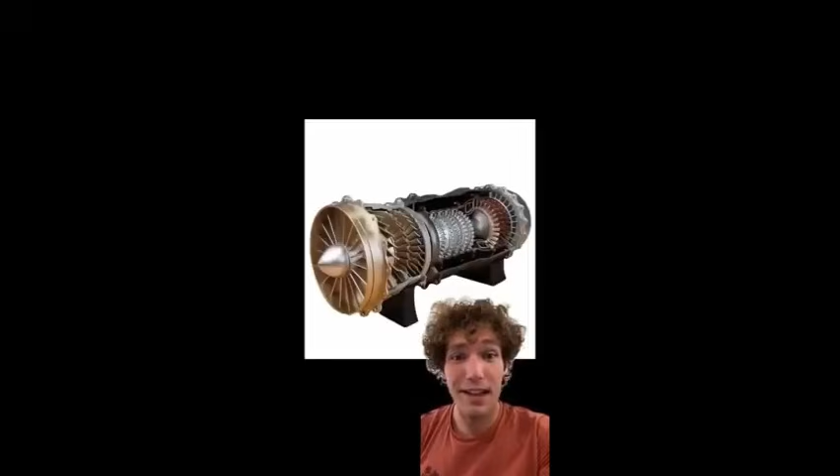So you have to put all of this into perspective. I'm not saying the plane doesn't use any fuel at all, but they're definitely lying about how much fuel it's actually using. So here's how a jet engine works.

The shape of the engine is like a vortex, and as the air goes through, it's pulled into the engine, and the vortex geometry spins the air through the engine, compressing it and sucking the air through, which propels the plane forward. The engine is literally sucking the plane forward by constantly propelling itself through the medium of the air. According to the owner's workshop manual, the secondary flow of compressed air accounts for 90% of the thrust produced from a jet engine, which means the fuel isn't actually being used for much.

And look at what this guy did. You see what he did? That's a vortex shape. Simply by getting the spindling thing to move, it is now able to propagate through the medium because of its vortex shape, and infinitely propel itself without requiring any source of energy, which is exactly what the engine is doing on the plane. It's pulling the air through and then pushing it out the other end. The fuel is only used to get the plane engine going up to speed, and for takeoff and landing. But when the plane is at cruising speed, it's fine.

Have you noticed how the engines are in front of the wing? If it was really so blistering hot and there was 85,000 gallons of fuel in the wing, why would they have the engine almost blowing directly on the wings? Couldn't it combust all of the fuel?

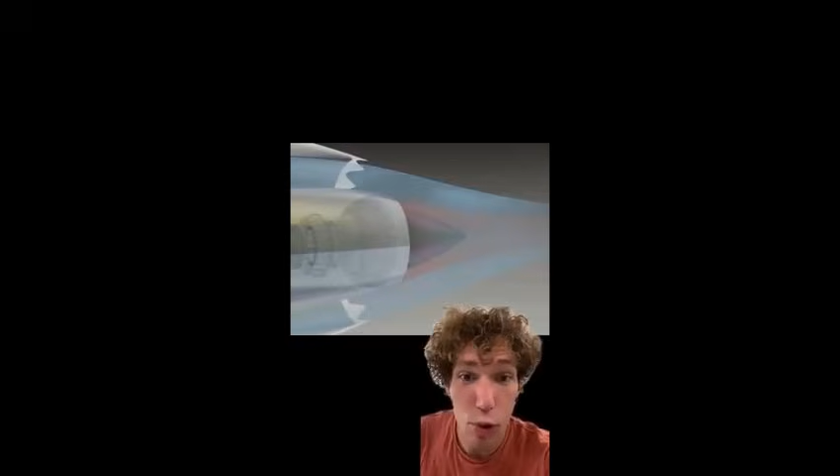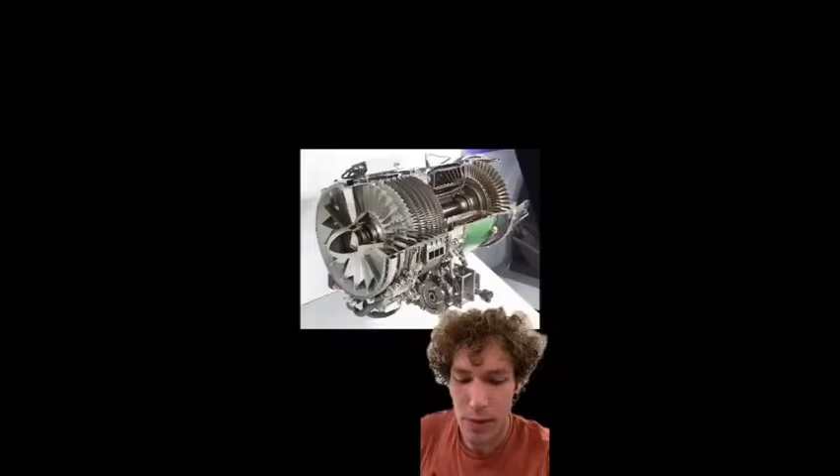You see, it's literally a vortex, and the engine is in front of the wing and not under it, so that the vortex can perfectly flow over the wing to create the propagation. But of course, this video was for entertainment purposes only. I have no idea how jet engines are made. I don't know anything about jets.

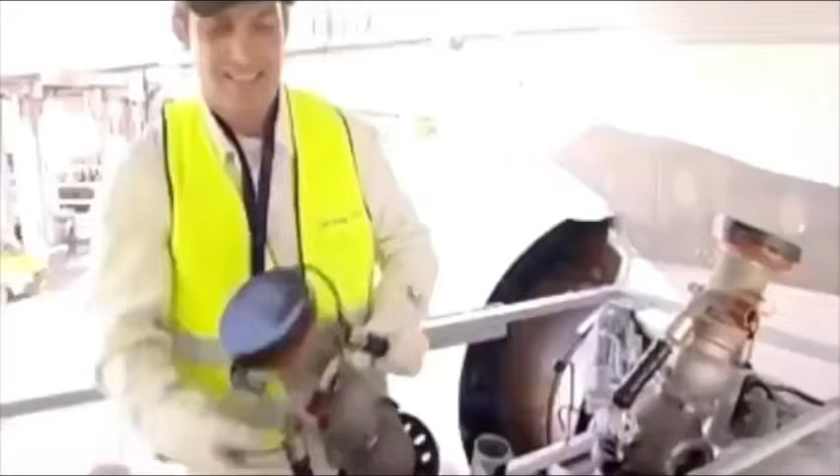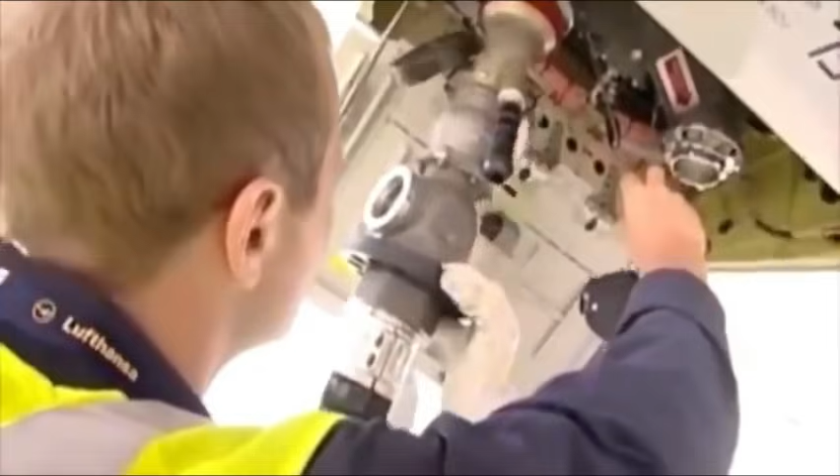Most of us have seen a plane refueling. They connect one or two hoses underneath the wing, connect that to a pump on board a refueling truck, which then pumps the fuel from underground tanks. This takes about 45 minutes for a full load. We never see the amount being pumped because the tanks are not visible. Let's make them visible and see how that looks.

It would take 16 of these 20,000 litre trucks to fill the A380. Where does all this fuel go? In the wings, you say? Okay, let's take a look at the wings, and you tell me where you think it all goes.

This is the A380 wing. Pretty huge. Let's put a fuel truck next to it. And another. And another. And another. And 4 more. Just for this wing. Another 8 go into the other wing. Can you see what I'm saying?

Okay, let's take a look at the fill rate. To fully fill the A380 takes approximately 45 minutes. To fill an Olympic-sized swimming pool takes about 4 days. That is 2.5 million litres of water. The capacity of the A380 is about 8% of the volume. 8% of 96 hours is 7.6 hours. That's a lot longer than 45 minutes.

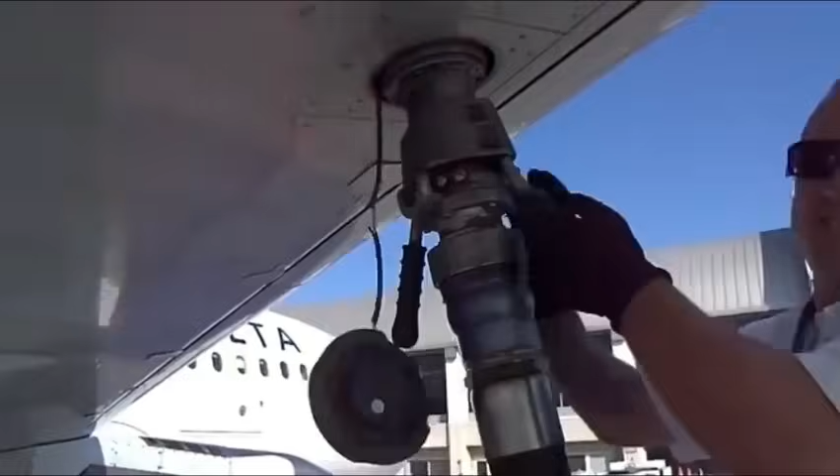To fill the tanks of an A380 in 45 minutes, you would have to have a pump and a hose that could pump 7,189 litres of fuel per minute. Let's look at something that pumps at about half that speed. Now the plane, now the fire hose. Don't you think that filling that wing with that sort of pressure would just rip a hole right through the top? It's only made of aluminium.

So far, we have no room for all of that fuel, an incredible weight of fuel, and a filling procedure that makes no sense whatsoever. Time to take a look at moving around with large bodies of liquid.

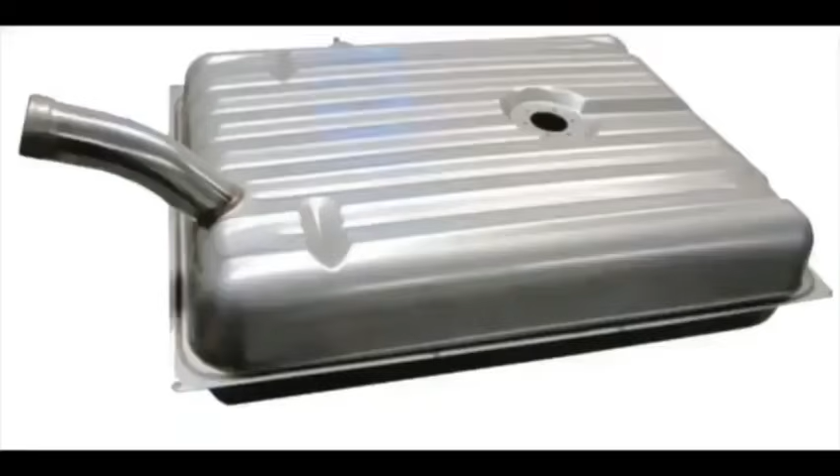The size of a large car's petrol tank is about 70 litres. Don't you sometimes wish that your petrol tank was bigger so you wouldn't have to fill up so often? There are reasons why this is so. Number one, the weight would drastically reduce the performance of the car. And number two, the amount of fuel sloshing about in the tank would seriously interfere with the road holding whilst going around corners. This doesn't seem to be the case with aircraft using vast quantities of fuel.

Let's take a look at what large bodies of liquid does to road holding.

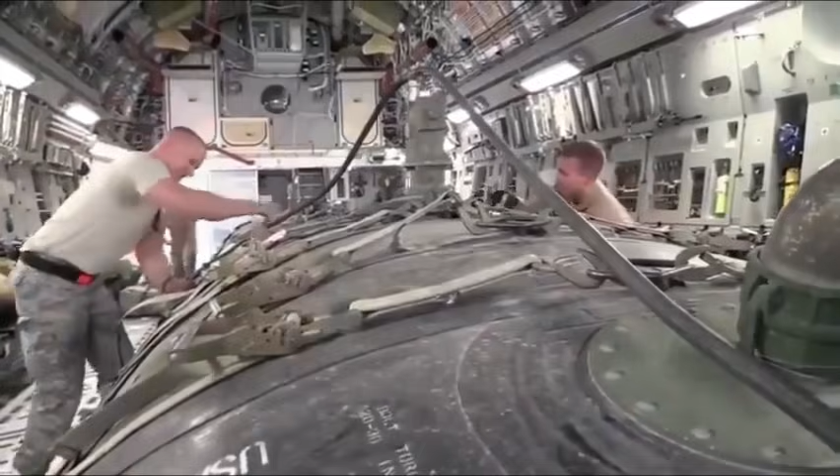The next video clip is from the US Air Force, showing the filling and strapping down of the large bladder tanks used for in-flight refueling of their aircraft. Bear in mind that these 3 tanks are only 9,000 US gallons. This is just under 10% of the fuel needed to fill the A380.

Look at the lengths these guys go to and the amount of straps needed to stop this lot sloshing around. Also, this 9,000 gallons takes up a good portion of the aircraft's cargo bay. Where on earth would you fit 10 times this amount on an A380? Is it making sense to you yet?

Let's move on to the workings of a modern fan turbine jet engine. Rather than explaining this myself, I will let this short video do the work for me. Observe that at the end they actually say that the secondary flow, which is only compressed air, is the major contributor to the engine's thrust.

Hear that, boys? What is it? Just another narrow-body aircraft. Hey, my atoms are shaking. Strange, it sounds far, but I bet my last proton that beast is much closer than you think. Hold on, people, it's a LEAP-powered aircraft. A leap into the unknown. What on earth is a leap? Something you sure haven't seen before. Everybody get ready, we're going in.

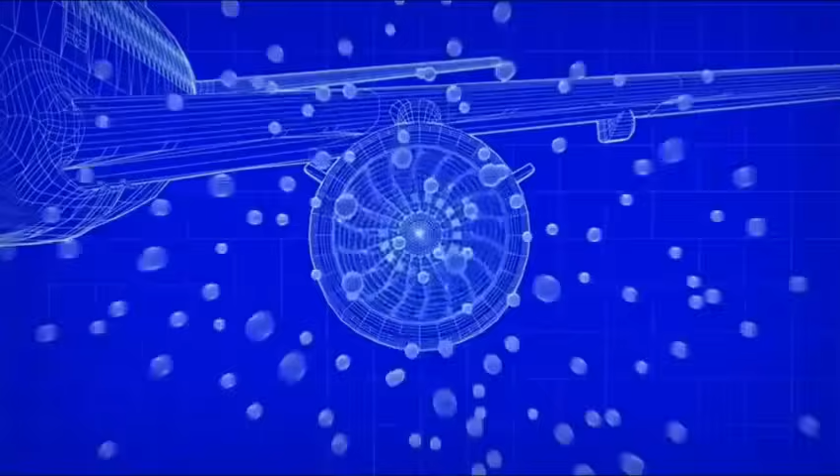Can someone please tell me what just happened? Sure, the engine makes a plane move forward. Thrust is produced by air being pulled in by the fan blades. Then this air is ejected at greater speed through the exhaust, creating the required pushing force. This is a principle of Newton's law: for every action, there is an equal and opposite reaction. So how is this possible?

Gentle souls, come with me to the bypass. Extreme sport freaks, with me, we'll hit the compressors, combustor, and turbines. The LEAP is a high bypass ratio engine, which means that a large amount of air bypasses the core of the engine to be ejected directly into the exhaust stream. The fan acts like a propeller. Its curved rotating blades accelerate the airflow into the engine. Lighter composite materials provide better efficiency and resistance.

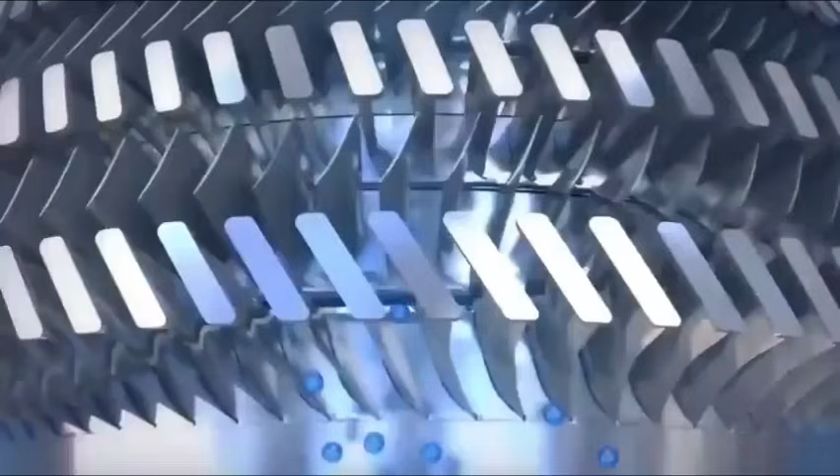Here come the compressors, get ready. Things are gonna heat up. Feel that? It's the low-pressure compressors squeezing us. Now the high-pressure compressors, you're gonna feel the difference. Ultra-efficient compressors deliver optimum air pressure and temperature conditions for combustion. It's rising up now.

Let's get toasted! Gentlemen, meet your kerosene counterparts. These guys are gonna light up your day. Already? We usually mingle inside. Not anymore. I thought there'd be more of you. Normally yes, but in this engine, fewer of us are needed. This little kerosene particle is right.

The LEAP engine burns less fuel than former engines. In addition, the fuel nozzles mix fuel and air before they enter the combustor, creating a homogeneous mixture that minimizes the peak temperature during combustion. This technology significantly reduces emissions. Okay, let's go.

The combustion chamber, this is the heart of the engine, where energy is created through combustion of fuel and compressed air. Are you ready? Here comes the final blast. What a boost! Where are we now?

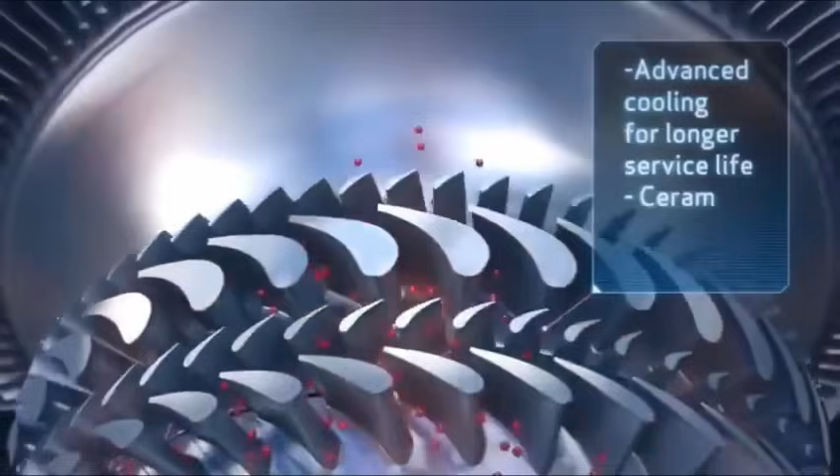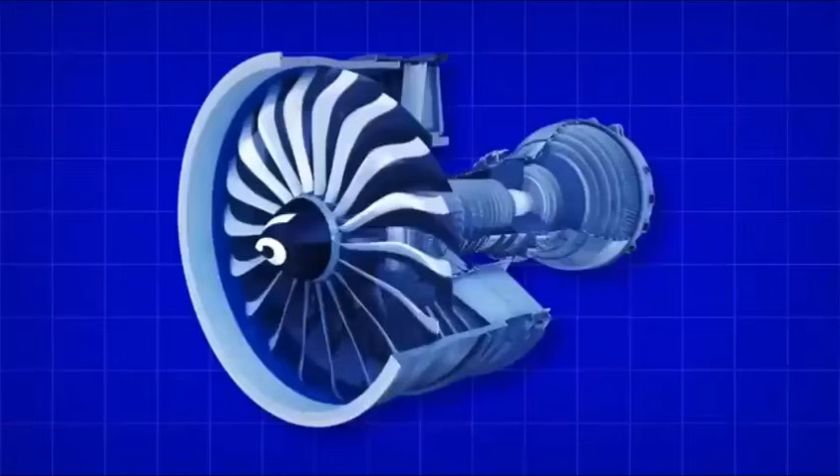Turbines, let's transfer our energy to them. This is the last extreme stage before we join the soft team. Enjoy. Advanced material and aerodynamics make the turbines much more efficient and durable. The pressure and speed of the hot gases provide the force needed to turn the turbines and its shaft, which in turn drives the compressor and fan.

Come on, guys, don't hang around. We alone are responsible for 90% of the thrust from this baby. Here come those adrenaline junkies. So how was it? Fast, hot, and fantastic. What a trip! Are you kidding me? It was us in the primary flow that did most of the job. Not exactly, kid, it's teamwork. We definitely need each other. We provided the energy to drive the engine, and they provided most of the thrust to make the aircraft move forward.

Hey boss, sounds like we're in luck today. You said it, it's game on again, boys. Let's go.

Now let's watch how compressed air, ejected with force into ordinary air, reacts. This is an experiment that anyone can do at home. You compress air inside a plastic bottle, pop open the top, and see the result: water vapor.

This is what is happening when jet engines are in cruise mode. They are running purely on compressed air, and the contrails are water vapor being ejected out from the engines. While small amounts of fuel are needed to get the jet engine up to speed, in cruise mode the engines use very little to no fuel whatsoever. We are being charged huge amounts for fuel that doesn't exist. It's not needed to fly these amazing machines. All that's needed is the most abundant thing we've been given: air.

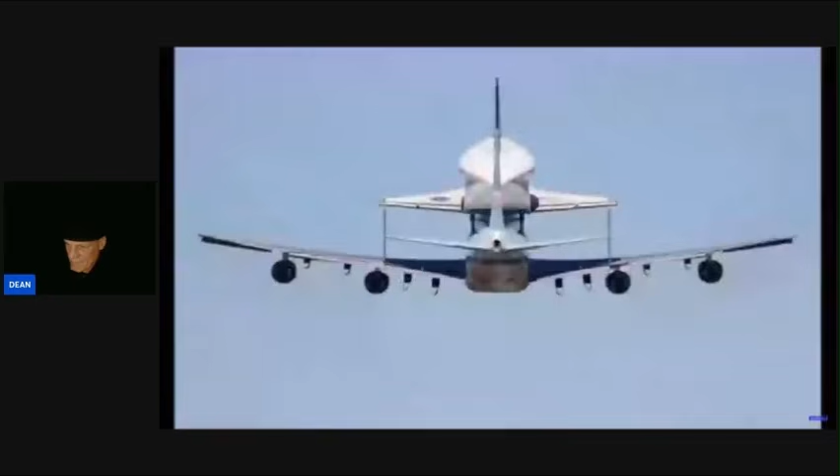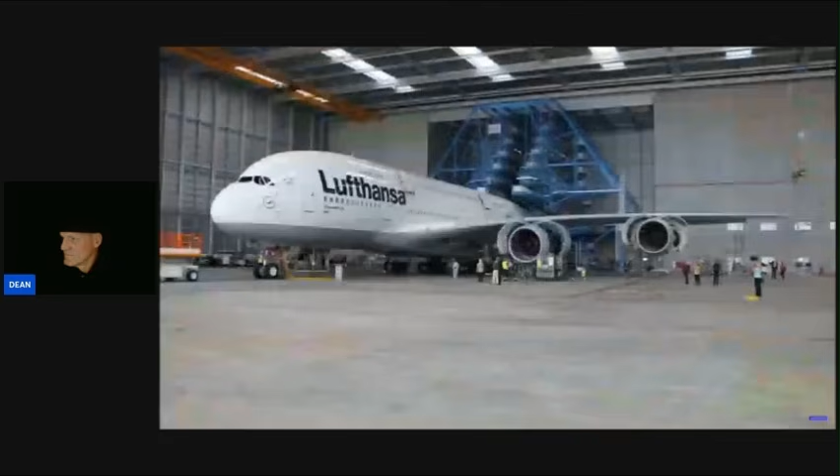As we'll get into in a minute, you can see that the structure does not include allowing for testing for carrying fuel. They only test it for air, because they're testing for compressed air, because that's what the wings carry, compressed air, and that's what helps the plane be so buoyant and the flights so smooth. There's air in the wings, not fuel, it seems, but you cannot find any pictures of any wing cross sections showing the bladders or the fuel compartments, except what I'm going to show you in a minute.

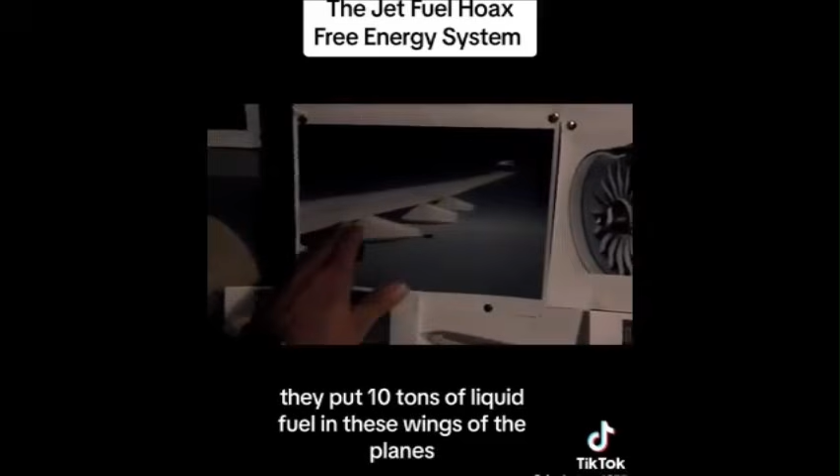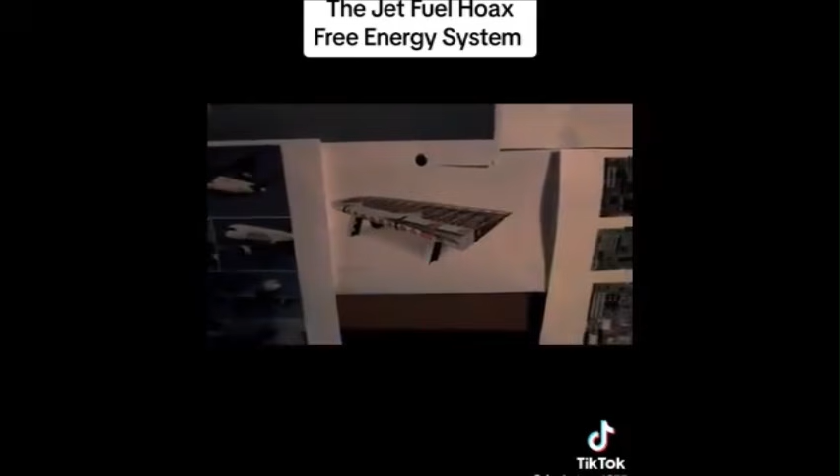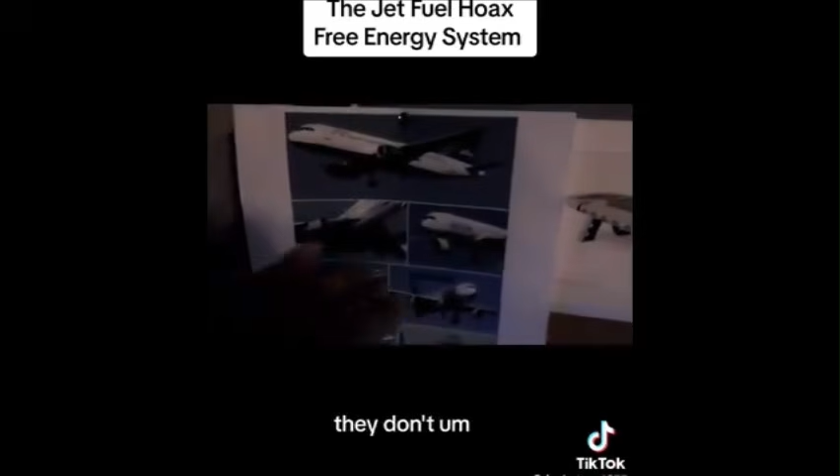So you tell me: the jet fuel hoax. What they tell us is they put 10 tons of liquid fuel in the wings of these planes. 10 tons of fuel in these wings, which would look like that in weight. All those cars piled on those wings would equal the amount of fuel they tell us they put in the wings of the planes. And the wings don't tip, they don't fall down a little bit when they get all that liquid in there. 10 tons? Well, something's up with that.

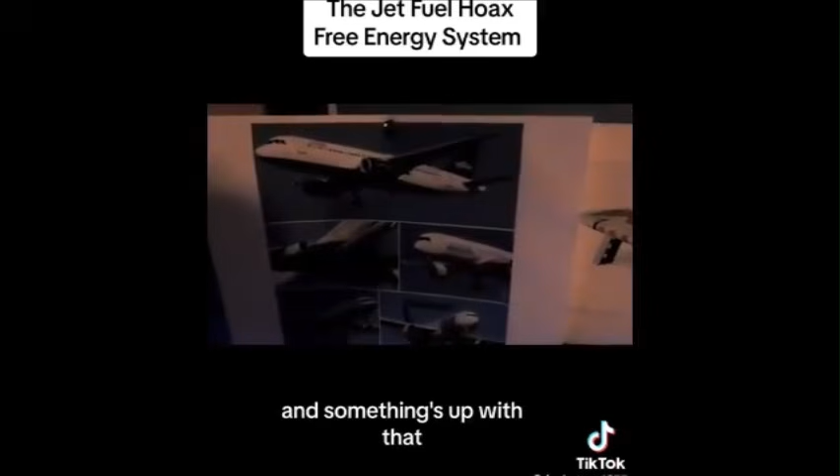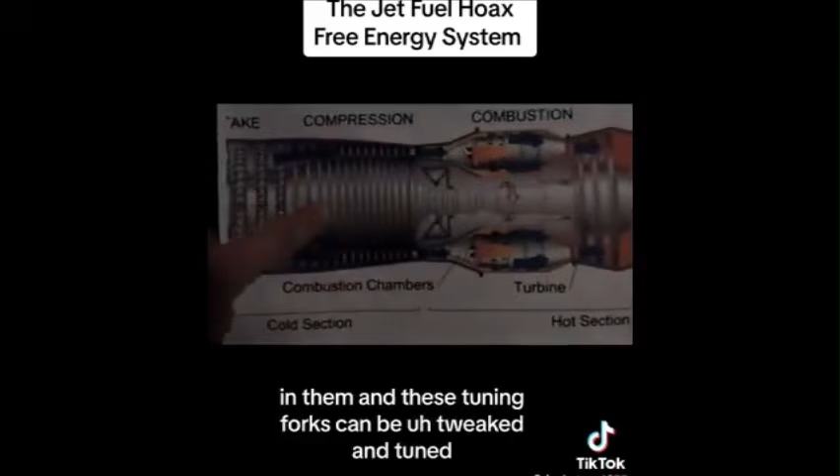That prompted me to definitely look into that a little more, and it came down to the turbines. What the turbines do is pull in the air, which is electrical. Air is electricity, Tesla knew that, Tesla figured that out. They pull that atmospheric energy out of the air, and pull that electrical air into these turbines, which have tuning forks in them, and these tuning forks can be tweaked and tuned.

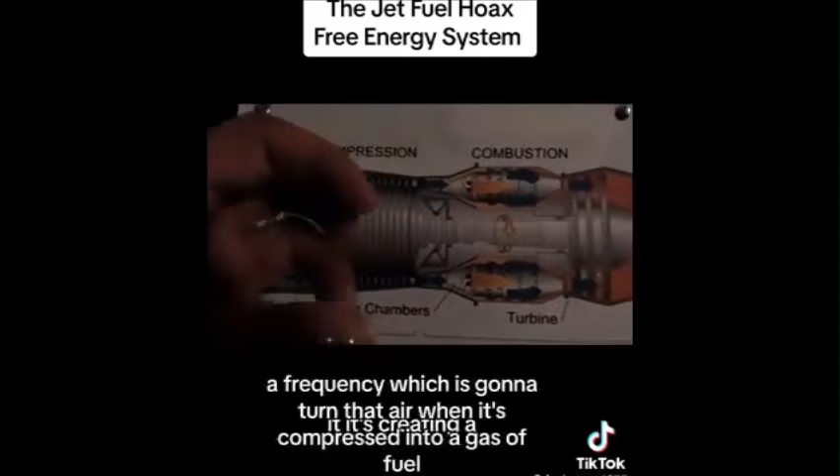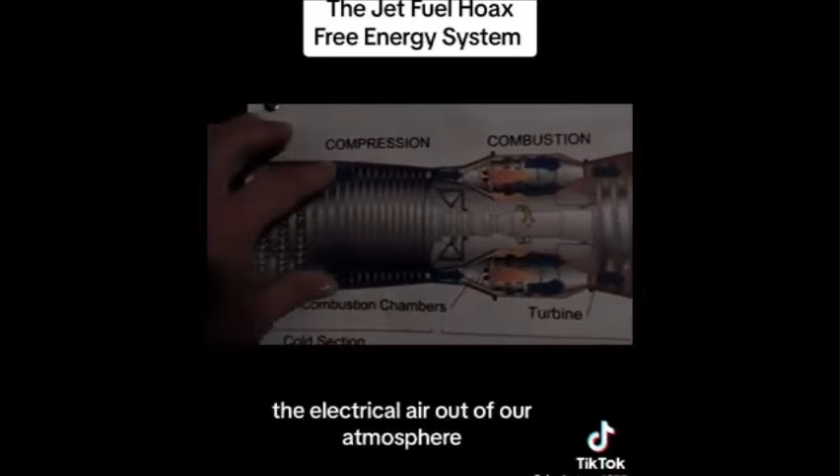And that creates resonance, and that's what creates all that sound when you hear a turbine revving up. It's creating a frequency, which turns that air, when compressed, into a gas, a fuel. So it's just taking the electrical air out of our atmosphere, compressing it, resonating it to a certain frequency, a tone that makes it vibrate, turns it into a gas, bam, there's your free energy engine using the air.

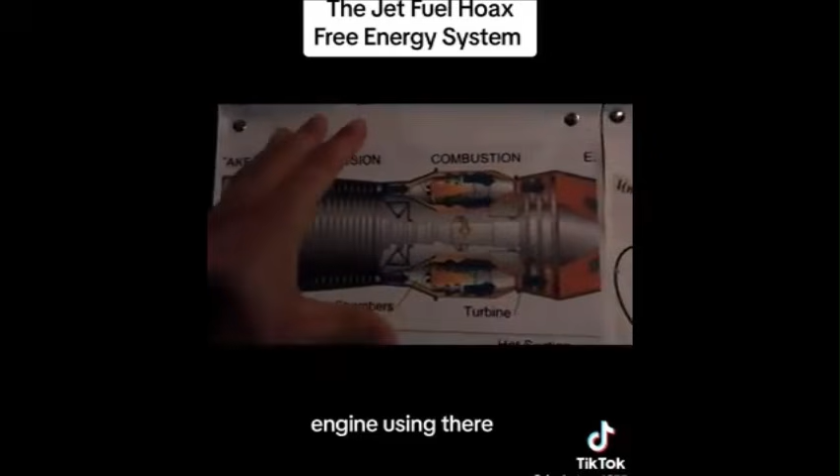And helium is the lifting gas. Lifting gas, thank you. Good evening. So, helium is the lifting gas.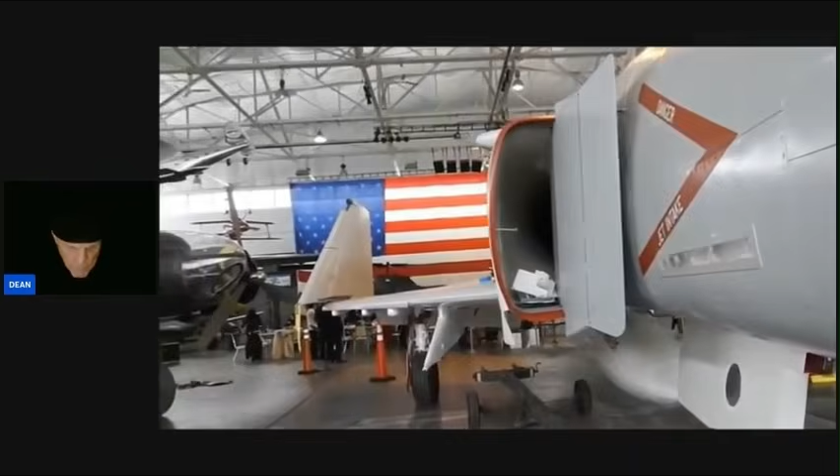They go into combat fully loaded with fuel to get you into target, and then they could drop the fuel tanks, which gives the aircraft better mobility and maneuverability without having the tanks hanging on to it. So those, they can drop those off? Yeah, the big tank underneath. These here are what they call, this is what they carry, about 14,000 to 16,000 pounds of bombs on it, if you put the hard points all on it.

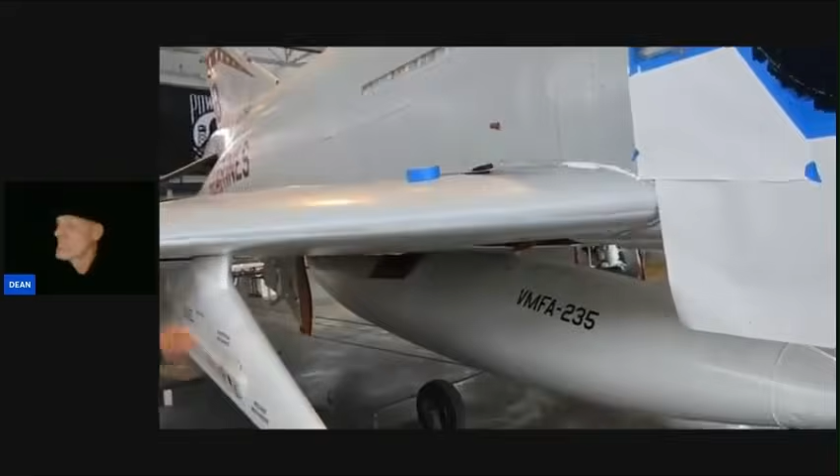And interesting, that's extra fuel. And they fuel it up on top? Yeah, there's a port, I believe it's up here on the top of the wing, somewhere in here, but they also can in-flight refuel it. You can get on Google and put in F4 Phantom and it'll show you how all that stuff goes. Very cool.

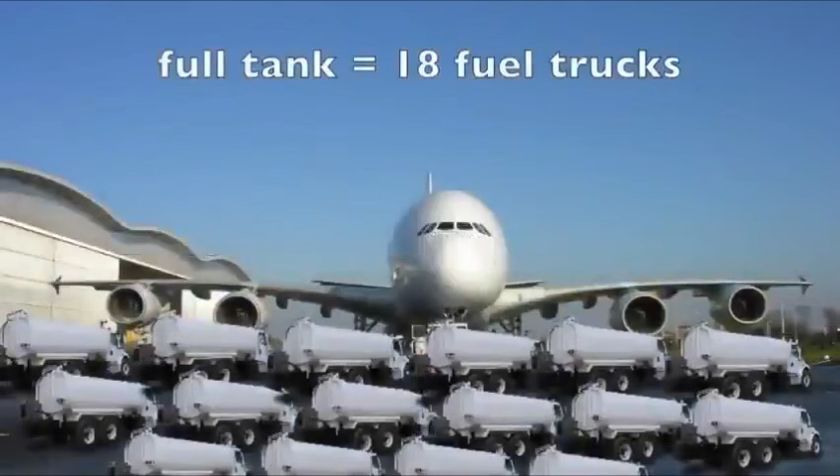In part 1, we looked at the ridiculous amounts of fuel supposedly being pumped into these aircraft, and the possibility that the technology being used is way beyond the level they are telling us. To those who obviously misunderstood part 1, I need to clarify: the airlines claim that fuel constitutes 50% of our ticket cost. I'm not saying that fuel is not being used. What I'm saying is that it's a fraction of what we're being charged for, and a minor part of flight technology.

Come on guys, don't hang around. We alone are responsible for 90% of the thrust. As stated in part 1, we have the engine manufacturers themselves saying that 90% of the thrust comes from the compressed bypass air and not from the combustion chamber. That's not me saying that, it's the people who design and make these jet engines. So it must be true, right? Yes and no, let's get into it.

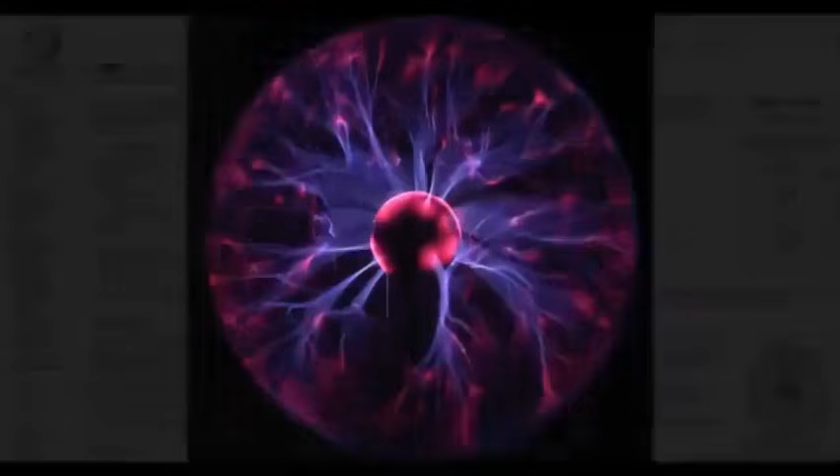To make sense of all this, we have to embrace the idea of the ether. The ether was a totally accepted element in the past.

Before Einstein and his wife concocted the widely acclaimed relativity theories, everyone, including all of the scientists, knew the existence of the ether. In one fell swoop, Einstein got rid of the ether and everybody else followed suit.

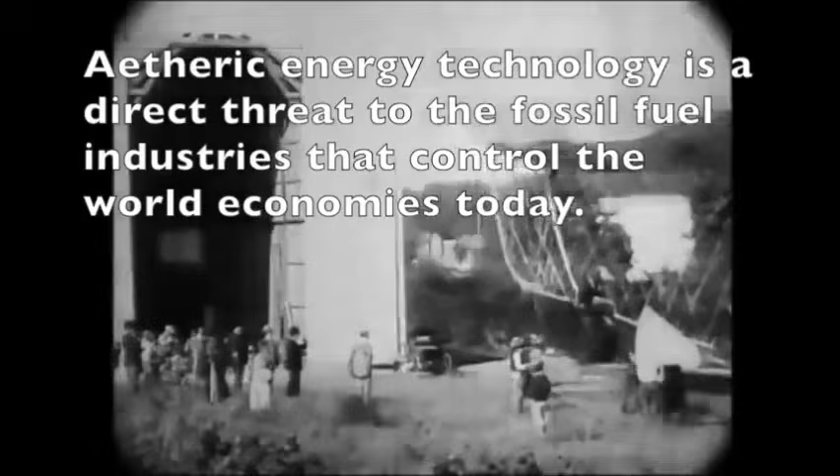The age-old technologies used in the design of these aircraft and engines also utilize the properties of the ether. That's the bit they're not telling us. To do so would fly in the face of contemporary scientific thinking, and they would be forced to recognize the existence of this hugely important element.

I said at the end of part 1 that I would be mentioning our little friends, the Bumblebees. Well, to do that, I first have to bring you up to speed with Victor and Victor. If you visit Victor Schauberger's Wikipedia page, you will find it sadly lacking in important information.

This man was a master at decoding the secrets of nature, a prolific writer and far ahead of his time, yet the mainstream scientists chose to ignore his work and label him a nutcase. Just this fact should throw up a plethora of red flags with people. This man dedicated his whole life to the study of nature, and he came up with some truly fascinating stuff.

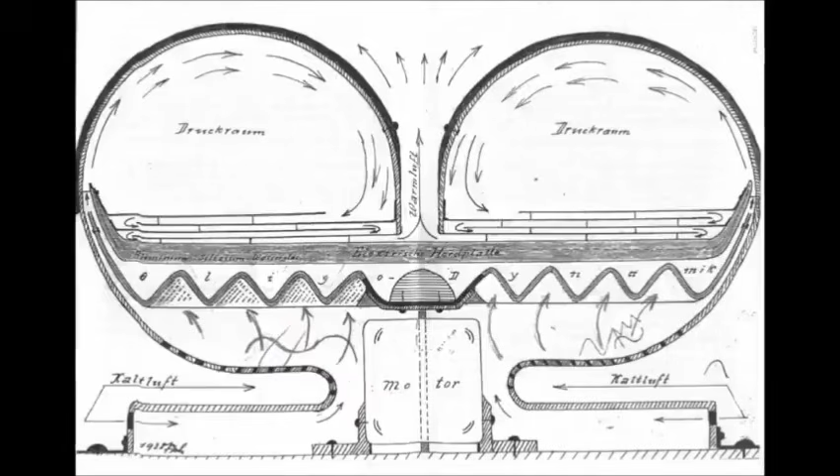Levitation, propulsion through the ether, and implosion technology, to name just a few. Let's start with implosion technology to show you that he wasn't just making this stuff up.

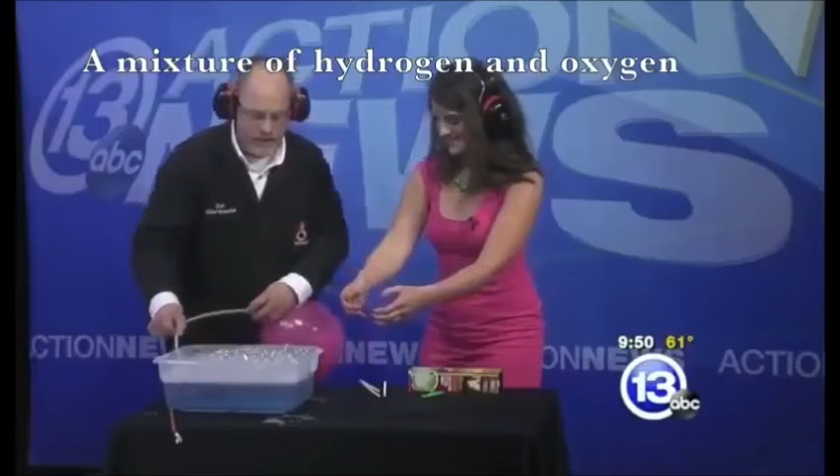As you will see in this clip, the gas that she's holding would normally be enough to blow a gaping great hole in her hand, but it doesn't. That's because it implodes rather than explodes. The force goes inwards rather than outwards. Implosion technology. In 3, 2, 1.

You okay? You could judge by the loudness of the implosion that there was a great deal of energy created, enough to seriously injure her, but apart from being slightly shaken up, she seems fine.

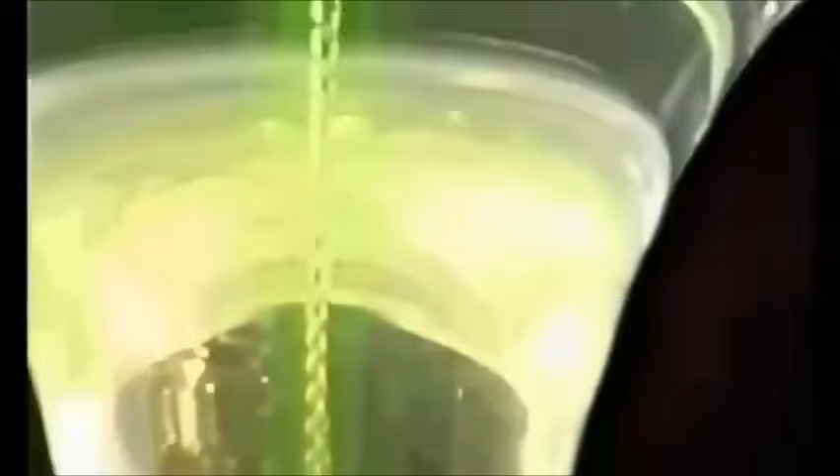Victor's main body of work was with water, but he postulated and demonstrated that this technology works just as well in other mediums, one of them being air, or the ether. Air is our medium, water is for the fish, but the two are intrinsically locked together because both mediums behave the same way when coerced.

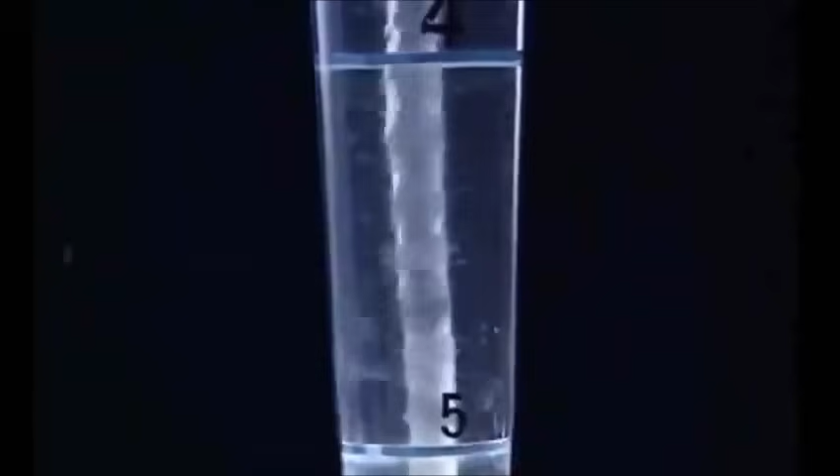I highly recommend watching the links for Victor's work in the show notes. These patterns and properties are used throughout nature, in the environment, in trees and shrubs, in flowers, and in animals. Basically, the whole of nature conforms to these rules, and Victor figured it out.

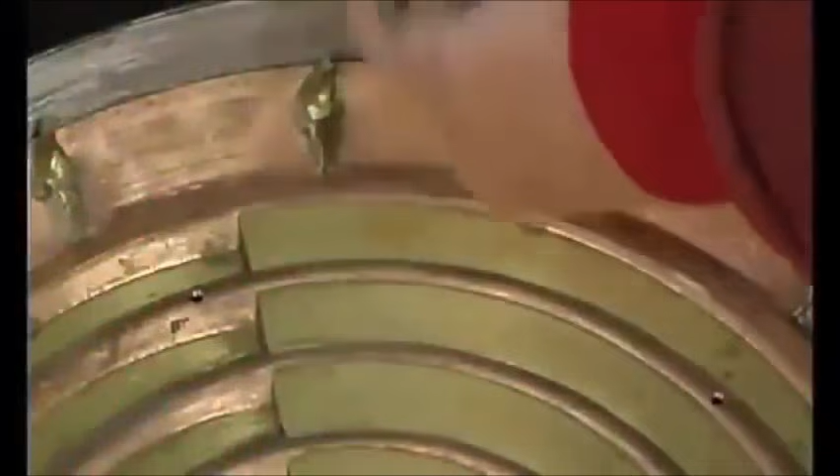As I showed earlier, Victor confirms that using the vortex idea on an aircraft, it will literally suck its way through the ether rather than thrusting against the air molecules.

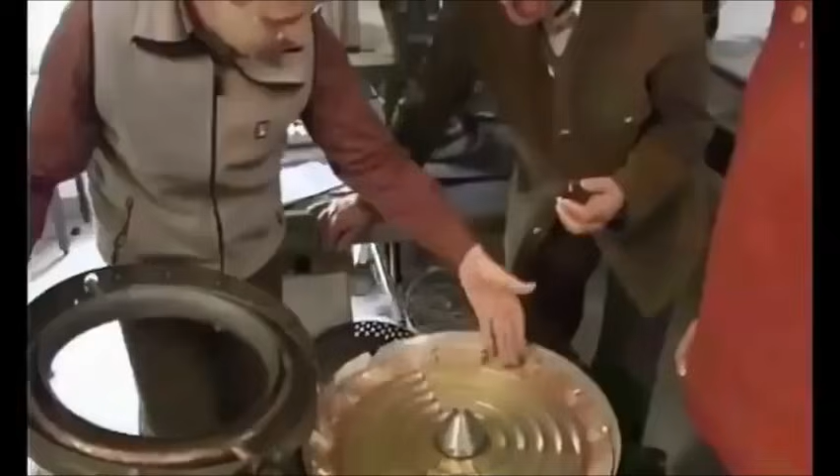Schauberger's central approach here was the principle of matter transformation. The elements of the air, particulate matter and gases are converted in this repulsator. One part escapes through the ring rotator, and the radiation energy, Schauberger talks about synthesis electricity, is emitted through the central axis. The repulsion creates a biological vacuum along the axis in front of it, into which the aeroplane is sucked.

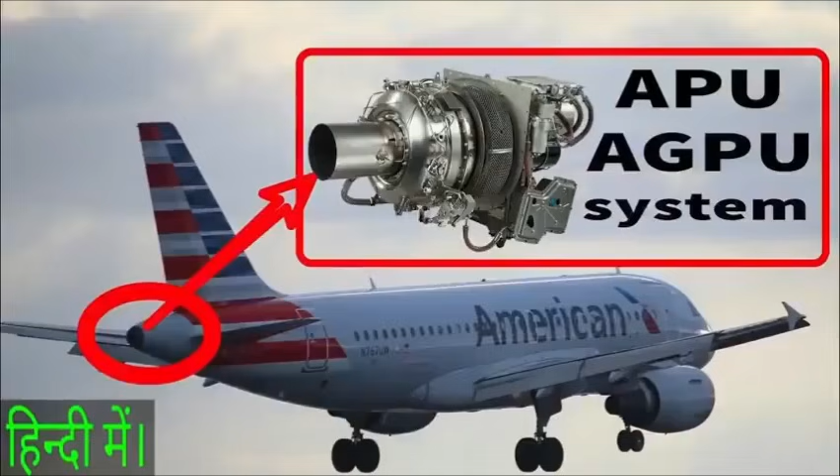The relatively small amount of fuel on board is used for takeoff, landing and taxiing. It's also used for the APU. The APU is the auxiliary power unit that's situated at the back end of most commercial aircraft. This is a small jet engine configured as a compressed air generator to feed the main engines at startup and during cruise mode, amongst other functions.

I must just add something that I didn't address in part 1. Military aircraft like fighter jets use a lot more fuel than commercial aircraft. They need the extra power and thrust that combustible fuel gives. In cruise mode, a commercial airliner does not need the extra power as its forward motion is sufficient to suck enough air into the engine.

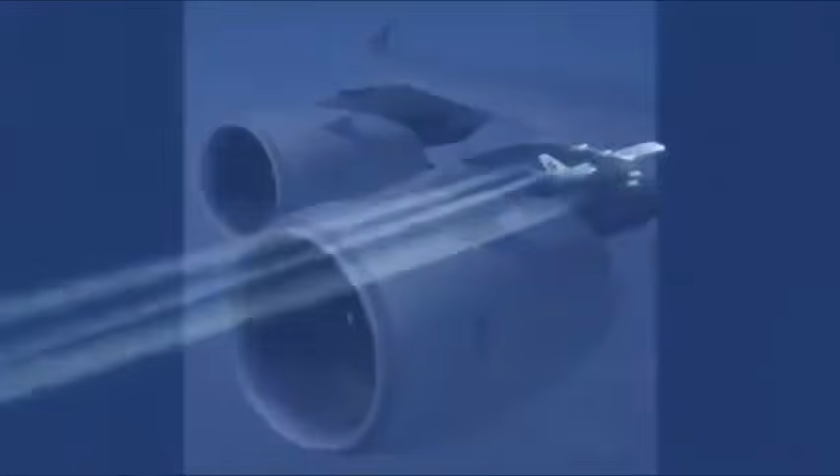Just a little observation here. The engines are designed to sit forward of the wings on pylons. From an engineering standpoint, it would be much easier to place them directly under the wings. As most people think, the jet engine spews out masses of superheated exhaust gas. If this was the case, then why would they put the exhaust directly under the wing where all the supposed fuel is stored? Next time you look at an aircraft, try and find the scorch marks under the wings from all of the super hot gases.

Before we leave Victor number 1, let's look at his vortex principles at work in real time. If you think his principles are just theories, then feast your eyes on this.

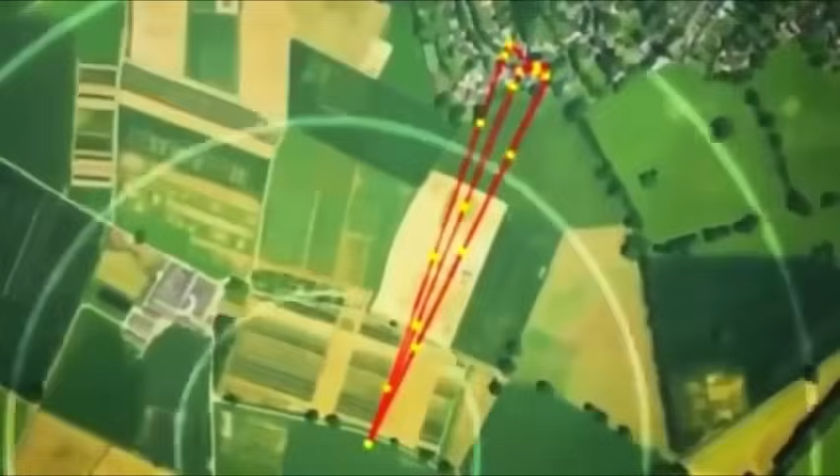The next surprise is where the bees go. They almost always overfly potentially decent food. Once they've found their patch, they then repeatedly shuttle to and from it. And this is the really clever bit: in spite of 30-mile-an-hour crosswinds, whether out or back, they all fly in dead straight lines.

A bumblebee can't fly aerodynamically. And he's right. And I said, well, what do bumblebees do? And they said, well, they levitate. And I said, well, how's that? And he says, come on, I'll show you. And he showed me. He wrote a book, incidentally. I don't know if it's still in print. It's in the Library of Congress.

The book is called Tomorrow's Energy Need Not Be Fuel. In that book, he gave reference to this levitation, that the bumblebee, when he starts to beat his wings, there's a little cavity, a hollow cavity next to the larynx inside his system that's hollow. And when he beats his wings, he starts to resonate this energy, and it goes back and forth, just similar to a guitar strumming on one side of the room and hitting the same chord on the other side of the room, or somebody hitting a high C and breaking a crystal. It's the same thing. It's resonance.

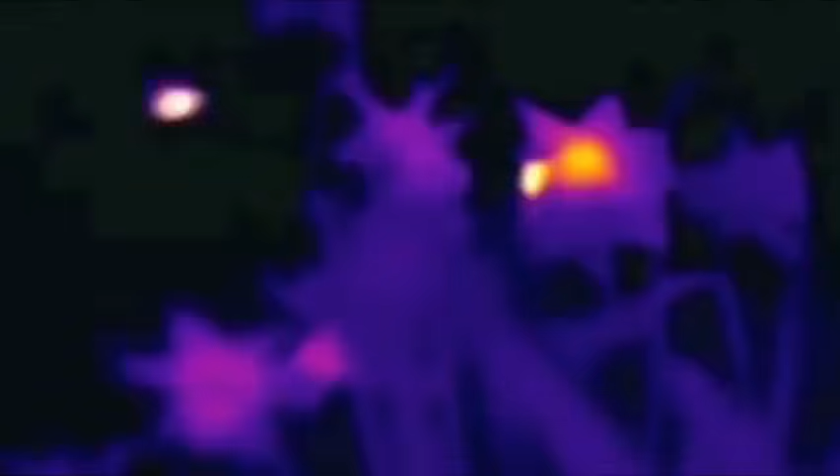And he said what they do, they resonate. And when they resonate, they eventually reach the resonance of the field around them. He explained it this way to me, that the Earth was, of course, spinning, but it was operating on a frequency of 8.5 hertz per second or so. He says once this bumblebee hits that resonant frequency of its surroundings, it becomes a free agent. It creates a magnetic bubble around itself, and it can go anywhere it wants. And I said, well, that's not in any of the science books. He said, I know, you probably never see it there either, but that's what happens. They'll discover it someday and bring it out, but we have a conventional way of doing things, and a natural way of doing things, and they're totally different.

They're diametrically opposed. The important point here is the bees. As you've heard, the bumblebee shouldn't really be able to fly. Those wings are way too small to lift that chubby little body off the ground. In fact, it's a bit of a conundrum also for mainstream scientists. They can travel in perfectly straight lines for long distances without any deviation, even during a howling crosswind. Because of the resonant frequencies produced by the vibration of their wings, they create a bubble in the ether, protecting them from any outside interference.

So levitation by sound waves is a real-world effect. You want more proof?

The bug wings themselves were creating an anti-gravity phenomenon under certain conditions. These technologies are known and used in modern-day aircraft manufacture. The vortexes being produced are helping the lift properties of the aircraft. This is why the engines are forward of the wings. If they were underneath the wings, the vortex wouldn't do its job. It has to flow over and not under the wing.

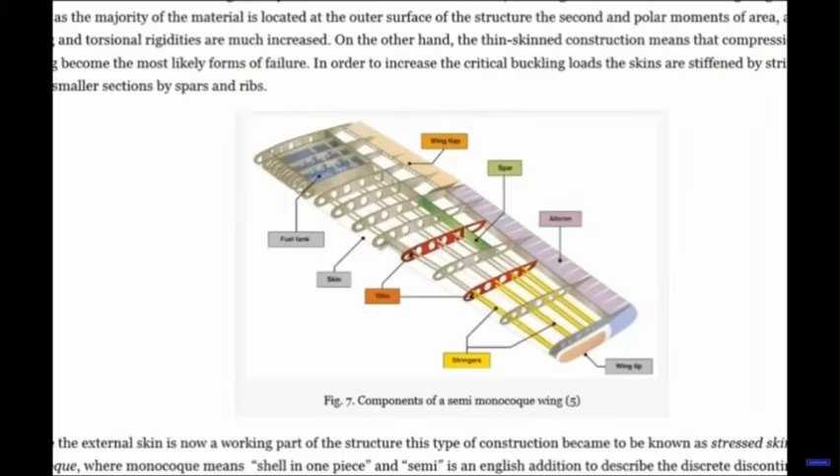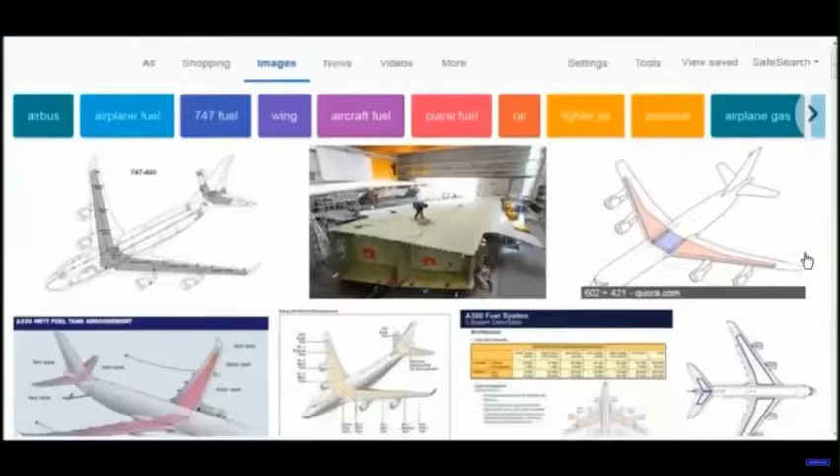Very rarely, if ever, do you see a picture of a wing from a real plane looking from the inside. I couldn't find any pictures at all from a real plane from the inside. I googled fuel bladders to look at what fuel tanks would look like from the inside, and there's no pictures, folks. There's some pictures of some walls, some metal aluminum walls. Now remember, wings are made of aluminum, okay? And it takes, what do they say, 89,000 gallons for an Airbus A380 airliner, 89,000 gallons.

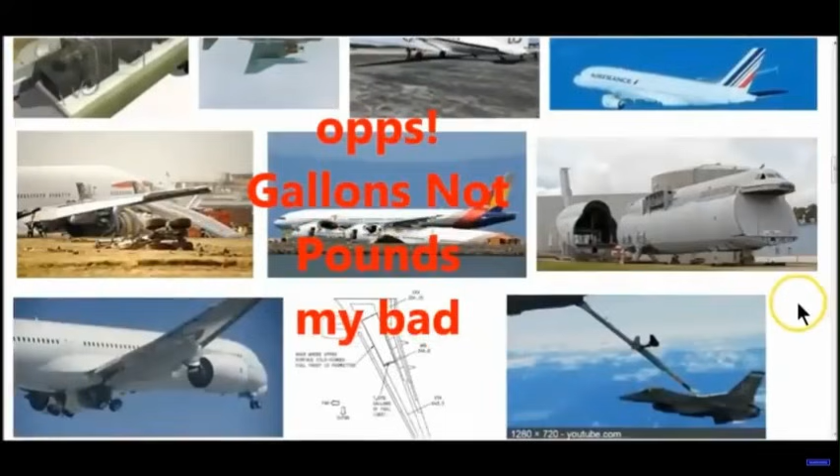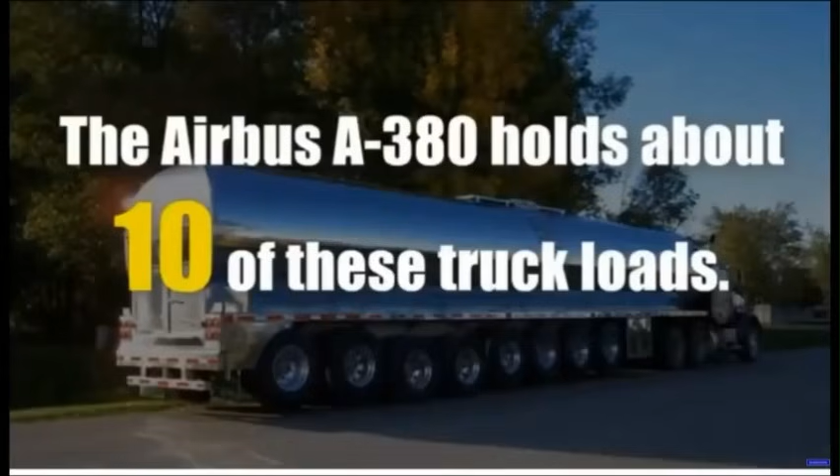And that would take the size - this is a picture of one tanker having 9,000 gallons of fuel or water carrying it, 9,000 gallons. Look at how big that is, folks. Look at how large it is. It's saying they hold 10 of these in their wings. Are you kidding me? So someone brilliantly put together this little thing and said, we're going to take the weight of a Camaro, which is an average around 3,400 pounds or so, and we're going to divide it into 89,000, metric to get the metric tons equal to the 250 metric tons, to find out how many cars are needed.

It's going to be 83 Camaros on each wing. So you're going to have these all stacked up in weight. You can see how heavy the wings would be if there was 89,000 gallons or 250 metric tons hanging out, and the other issue is the temperature.

Here they say they burn kerosene, right? So the planes are flying at minus 69 degrees, and then you ramp it up to 500 miles an hour, and the air is much colder then. Well, how cold is it that it needs to ignite kerosene? And you're going to see here it takes over 400 degrees to ignite kerosene. And here's a military aircraft.

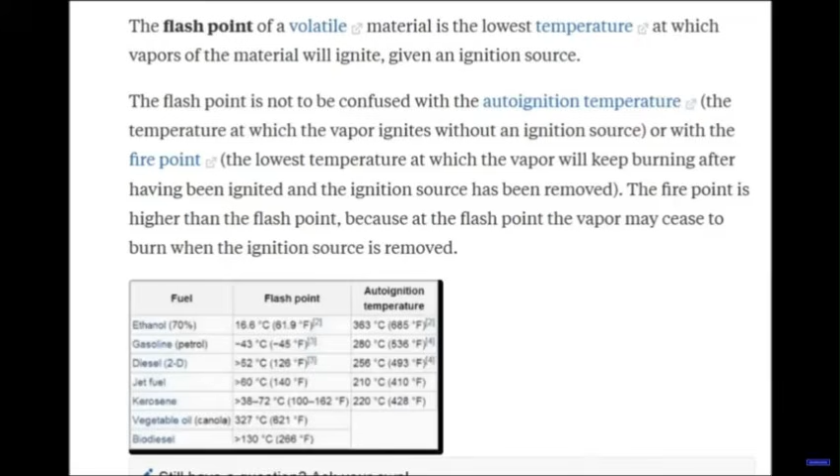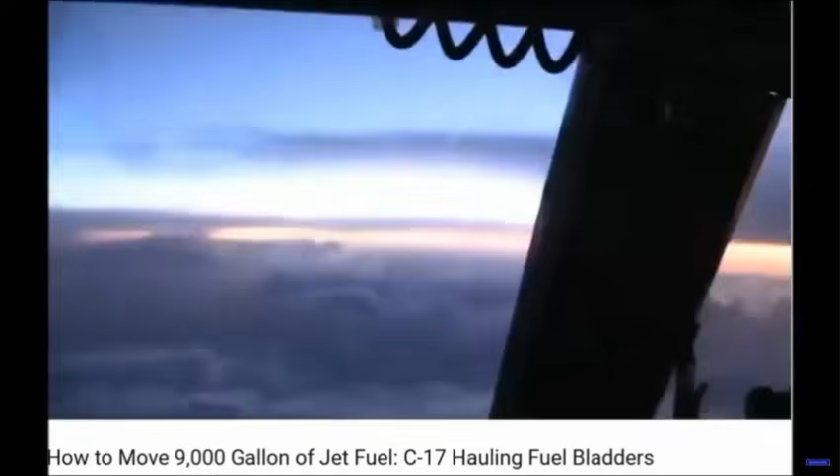These are 9,000 gallon bladders. It would take, what did we say, 10 of these in the wings? Are you kidding me? You're going to tell me there's 10 of these bladders in every wing of an Airbus A380 flying around? And you'll see a little later, these wings aren't that wide. It could not possibly accommodate that much fuel.

It's impossible. Most insane internet rabbit holes that are oddly convincing, part 6-7. Jet fuel is a hoax, and airplanes don't actually burn fuel to fly, but rather use an energy source that's gonna have you questioning everything. Just a fun theory for entertainment purposes only.

So this is a plane. It flies in the air using jet fuel, or so we're told. A typical Boeing 747 carries about 64,000 gallons or 242,000 liters of fuel. That's a lot. A literal metric ton. Actually, about 193 metric tons to be exact.

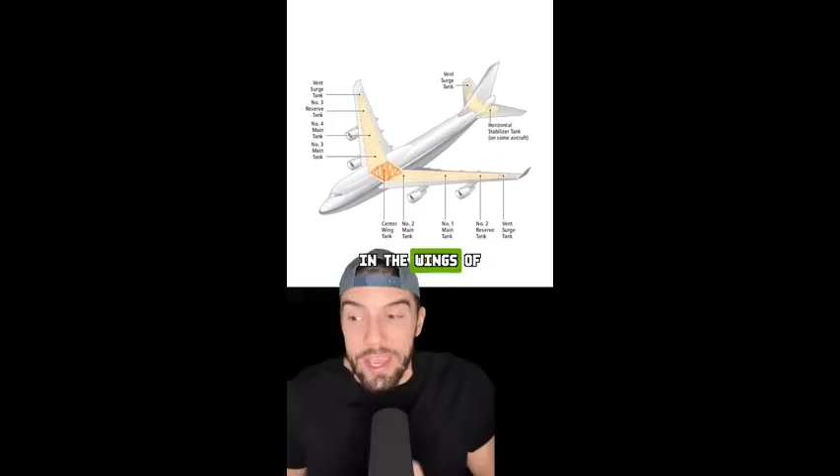Like, this entire tank is really squeezed into those thin sheets of metal? It just visually doesn't make any sense.

Think about the time it takes for an airplane to refuel. At an airport, you usually don't see the fuel pump connected to the plane for more than a couple minutes at a time. A regular car takes about 12 gallons of fuel and 2 minutes to fill up. Even if jet fuel pumps pumped at 10 times the rate of a regular car gas pump, do the math, and it should take around 9 hours to fill just half of the plane's 64,000 gallon capacity. Yet we somehow never see a plane getting pumped for more than a couple minutes, if even at all.

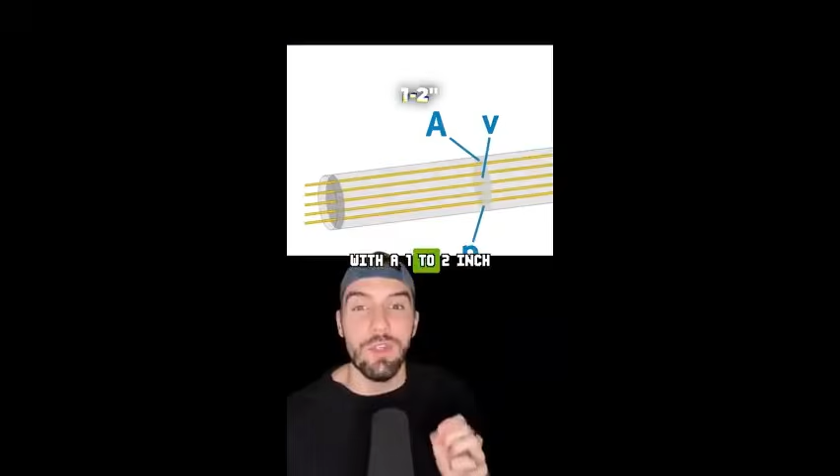The pillars found inside these temples are so symmetrical, so insanely detailed, they look like they're 3D printed, made hundreds if not thousands of years ago, and also appear to have been made for much more than just aesthetic purpose, because the engineering behind these pillars is nothing short of miraculous, with moving stone parts that can be physically rotated like they're part of a machine. Some of them aren't even connected to the ground, and just how on earth did they pull that off?

These pillars are so meticulously designed with incredible laser-like detail and precision, near perfect circular symmetry that look like they were made with modern technology, and also happen to be in a similar shape of an airplane turbine engine. This is where we go a little off the rails. Remember, entertainment purposes only, right?

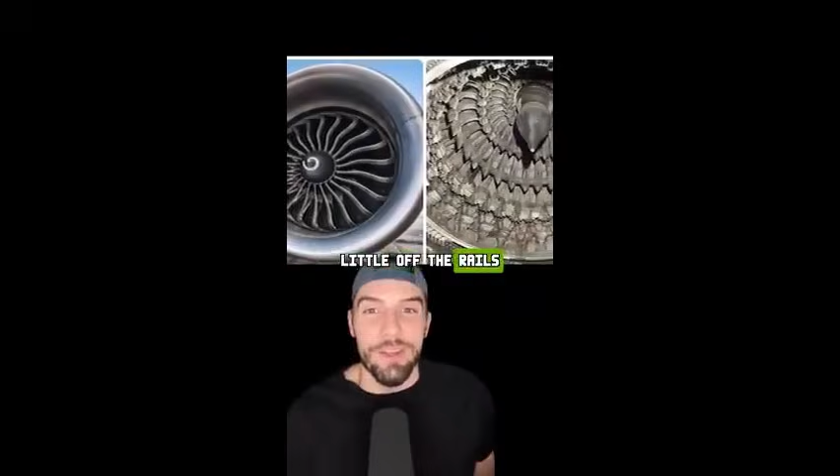Many fringe theories state that ancient temples and buildings like these were actually power plants that provided energy for past civilizations, like the pyramids of Egypt in the Giza power plant theory, and the same is thought of the temples of ancient India like Kailash and Hoysala, which use specific ancient mechanisms and esoteric knowledge to harness atmospheric energy from the sky to power their ancient societies. I told you this was gonna get weird.

Well, now it's being said that same technology is actually being used in modern airplanes, which only use jet fuel to take off, and once they reach a certain altitude, they tap into this atmospheric energy to stay lifted and move fast, which they'd have better access to because of how high planes fly. That's where this energy is supposedly found: Tartaria technology, Nikola Tesla technology, zero-point energy being used right under our noses, all while taking money out of our pockets with expensive plane tickets, blaming it on the copious amounts of jet fuel they allegedly need, when they're actually just using the free, unlimited atmospheric energy harnessed by our ancestors.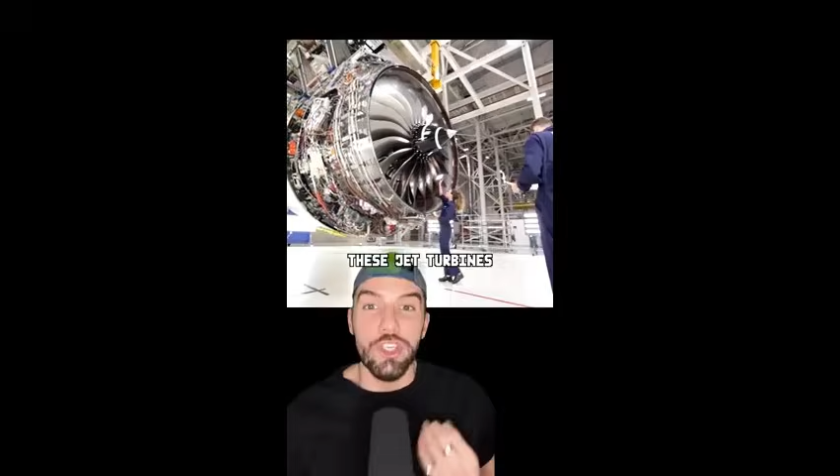Absolutely insane, I know. But listen, a Boeing 747 can weigh up to 220 tons, while an Airbus 380 can go up to 600 tons. Have you ever stopped to think about how much of a modern miracle it is for a 600-ton metal behemoth to fly through the air for 16 plus hours on end? And all it takes is 4 of these jet turbines, which for how powerful they are, aren't even really used anywhere else except for aviation. But even so, someone has to make these engines, and surely it would be much too difficult to keep something like this a secret with hundreds of companies all manufacturing them, right?

Actually, only 3 companies own 99% of all turbine manufacturing in the world: GE Aerospace, Pratt & Whitney, and Rolls-Royce. Any other manufacturer is in some way associated with these big 3. And of course, all of these companies have the usual suspects, Vanguard and BlackRock, as their top shareholders, the 2 mega companies that own everything, who control the 3 companies that essentially power every airline on the planet, also making it almost impossible for anyone else to make their own commercial turbines, with regulations, gatekeepers, certifications, and import controls, to keep their oligopoly in power and free from independent producers, to keep this technology as close to their chest as possible. Are 4 of these turbines really enough to keep a 600-ton airplane suspended in the air, traveling at hundreds of miles an hour for hours on end, propelled by just the air?

I mean, maybe they are. This is what internet rabbit holes are all about after all. Roast me in the comments if you disagree.

Well, I put together a little slideshow here, and I want to talk about jet fuel. Let's see how this goes. And why would they possibly want to lie to us about jet fuel?

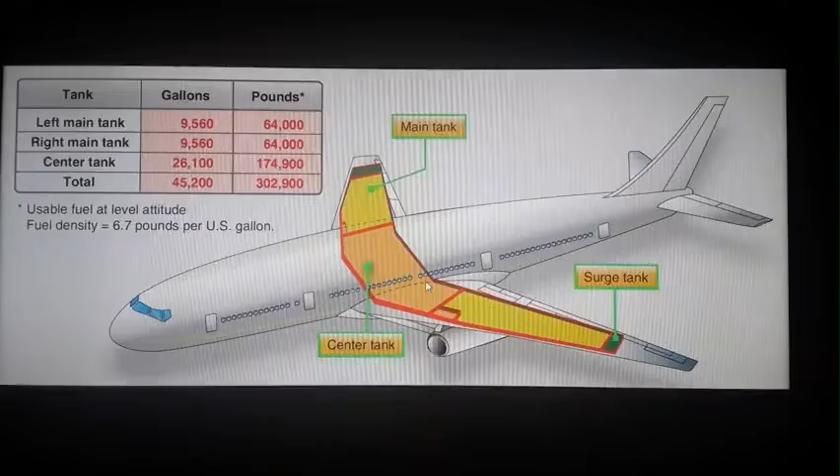Now, here's a chart. I have to take screenshots, so I hope I get all this in here. Each wing supposedly holds 9,560 gallons at a weight of 64,000 pounds in each one of those wings. And the center tank is 26,100 gallons, at the weight of 174,900 pounds, totaling a little over 300,000 pounds, totaling gallons in these 3 tanks, 45,200 gallons. This is their figures now. And they claim that it's 6.7 pounds per gallon.

Now if you take the 9, there's your 9, add your 5 and your 6, you get 11. 9, 11 again. You add 2 plus 6 plus 1 equals 9. 4 plus 5 plus 2 equals 11. I just found that kind of interesting.

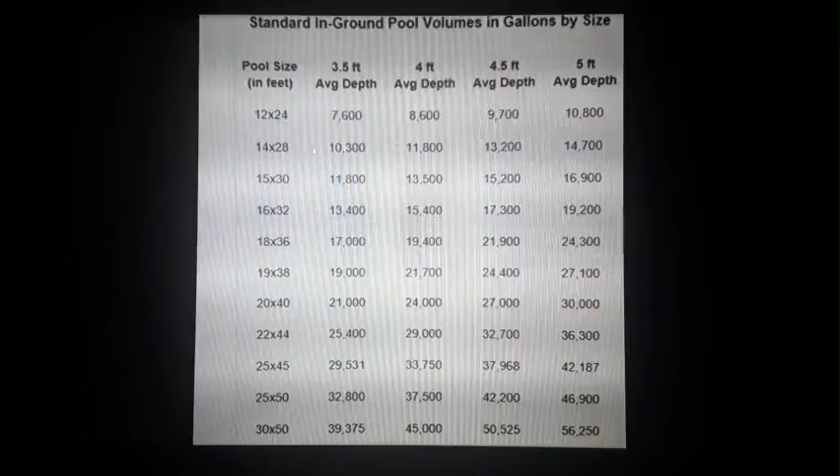Here's a chart of how much water it takes to fill a round pool. And here's a chart on in-ground pools. I'll break this down a little bit later. I'll show you how big the pool would have to be. Because right here, here's your gallons each of them weigh, and there's your total. You can pause it and look at it.

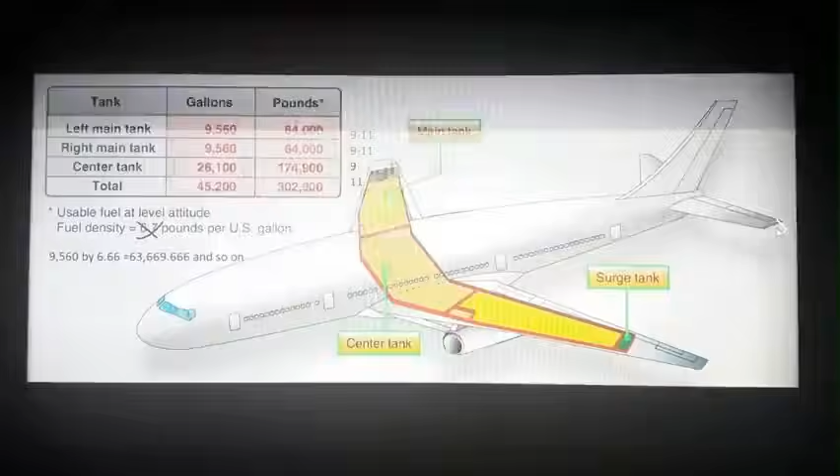Now, depending upon the size of the jet is how much the turbine weighs, anywhere from 46,500 to 50,100. Let's just say 45,000 pounds per turbine. Plus you also got 64,000 pounds in fuel. So you're talking at least 100,000 pounds per wing, fuel and turbine motor, right there, held on by that flimsy aluminum wing.

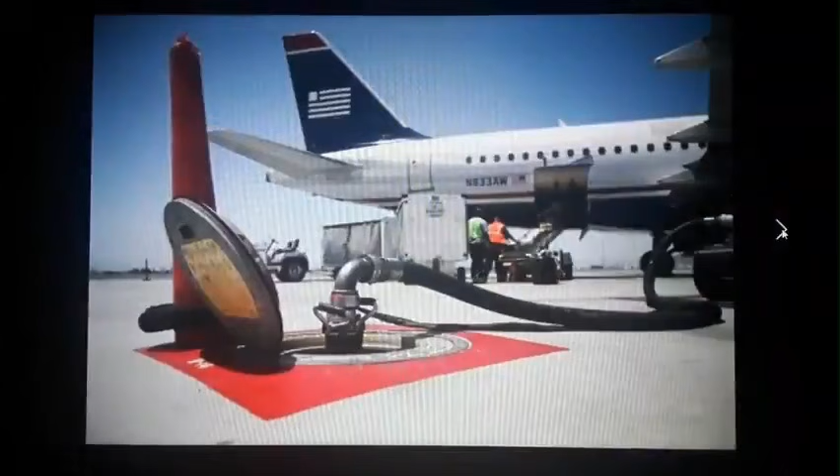According to them, here they are fueling it from underneath, out of the ground. And something else very interesting: when they fuel a jet, they only fuel one wing. So that fuel, 42,000 gallons of fuel, has to fill up this wing, go into the belly, and be transferred over to the other wing, because they only fuel one wing. At least I never saw a photo of any where they're fueling both wings.

There's your chart again, I'll keep showing that so you can reference it. There's your 12 by 24 foot pool. There they are filling one up from a 10,000 gallon tanker. There they are coming up out of the ground, filling up one wing, which, remember, it's got to be transferred to the other side.

People say, how can a deception this big, how can so many people be involved? Look into secret societies, look into their foot soldiers. And if only 1% of 7 billion people were involved, that's 70 million people. And follow the money, trillions have been made off of jet fuel. Look at that wing, you decide. There's a 10,000 gallon tanker filling up one wing.

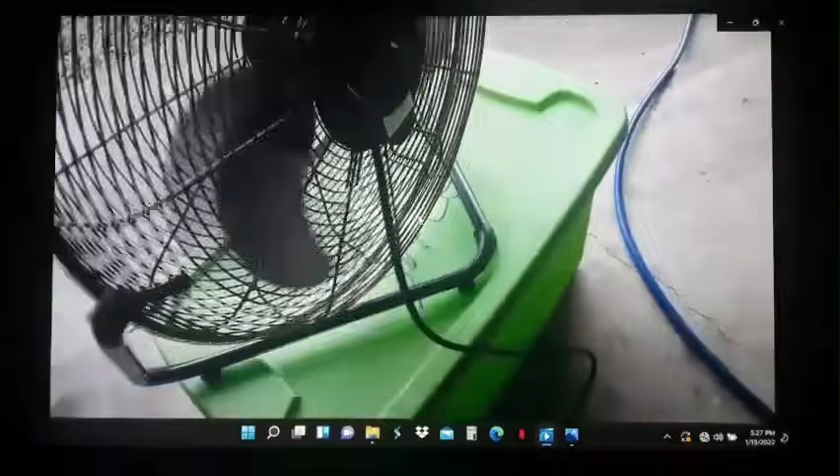Remember, you don't need combustible engines to run a lawnmower anymore, or to operate a fan. All it needs is air. And electric and battery operated automobiles. And they even have battery powered aircraft, at least they have the technology for it. And they show these, if you look it up.

Everything I'm showing you, I found on a Google search, and you can find it too. Those don't take any fuel. They're showing you they had that technology. And what we're finding out, whatever technology they show us, they've had for decades.

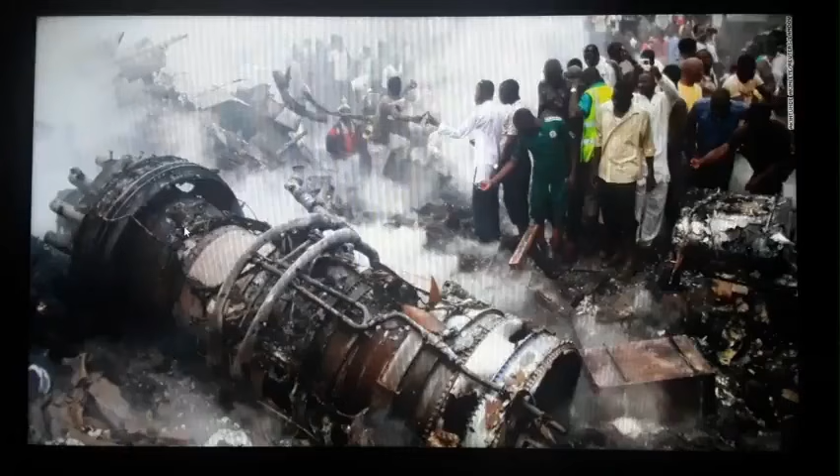Here's another one, fuselage in the back. If you look over here to your left, that wing's intact. Look here, little scorched, but it still didn't blow up. Here's from another wreck, one of your turbine engines. There was fire because there's smoke everywhere, but the turbine did not disintegrate. That will come in here in a minute in this video. Here's another one that survived the crash.

There's your chart again, showing you how many gallons is supposedly in each wing and in the belly, and the weight. Remember, 100,000 pounds per wing with the motor and the fuel. And how the numbers, the 666 and the 911, are all over this.

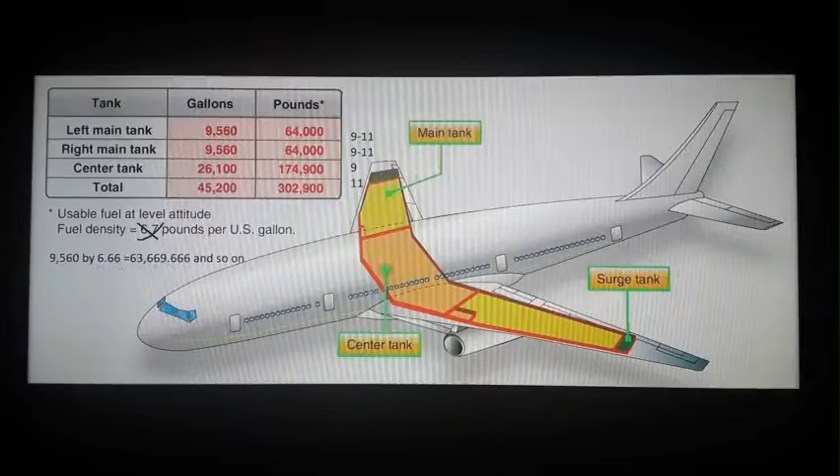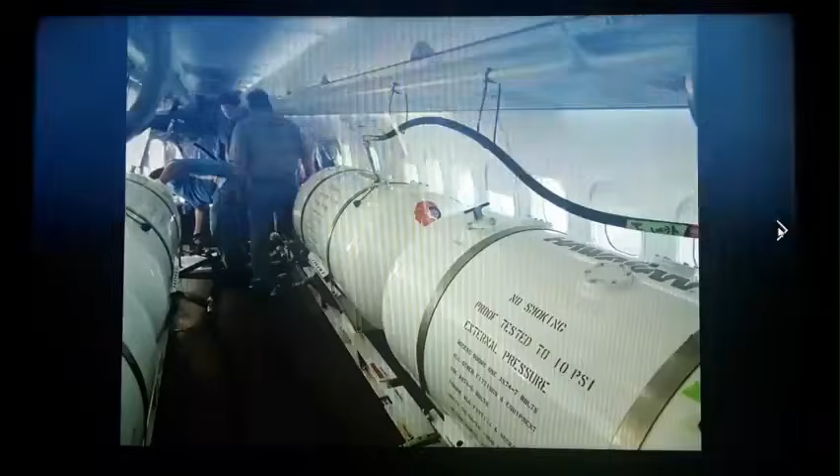The chemtrails. They claim that is just vapor, water vapor, coming from the fuel in a worn-out turbine motor. That is just water vapor, that's not even coming from the turbines. Or is it a converted jetliner spraying the masses? Spraying the masses.

And for all you Trump fans that think he's your savior, he can do no wrong, he's a man of God — he's touring one of these chemical factories that are spraying you.

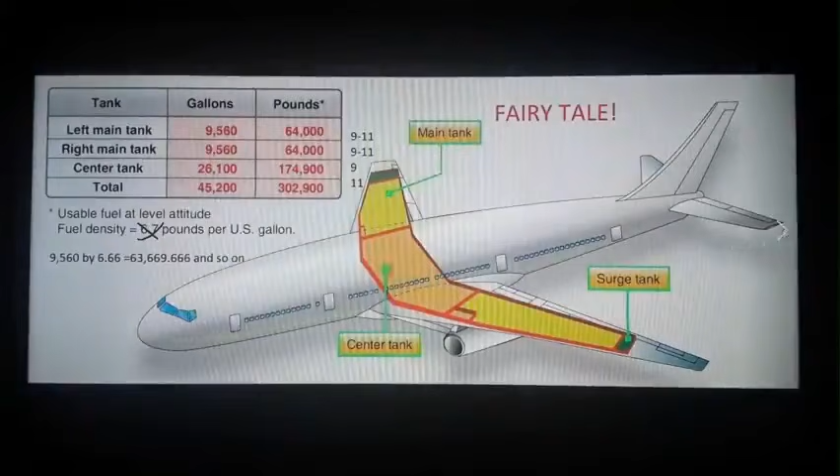So why would they want the masses to believe in jet fuel? Well, there's just 2 cover-up stories, plus follow the money. Here's your diagram again. Do you believe that one of those are in each wing and 2 of those in the belly of that jet airliner? Or that jet airliner? No way.